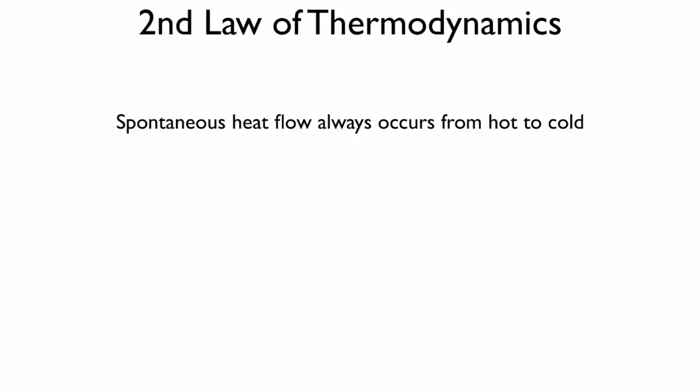Will the ice cube ever suck in more cold? If it just sits there, it can't suck in cold. It doesn't suck in cold. And that's kind of what the second law of thermodynamics is trying to say. Heat always flows from the hotter thing to a colder thing, not the other way around. The ice cube's not going to cool off the table directly. The table will become colder because thermal energy is coming from the table into the ice cube, and so on and so forth. So that's interesting, but for a physicist, what really matters is what can you do with that information.

In physics, we're all about what can we cause to happen based on our knowledge. And we've been doing it all semester long. We did it with kinematics, we did it with Newton's laws, momentum, energy. All of these toolboxes we gave you were all kind of designed with this idea of what kind of motion can we cause to have happen. What sort of power do we have in being able to predict what's going to happen? These are all things that physicists are wanting to do.

So we're going to talk today almost exclusively about heat engines and refrigerators. We're going to talk a little bit about the engineering, but these are ideas, these are schematics, these are broad concepts about how do we take advantage of the second law of thermodynamics, where heat naturally moves from hot things to cold things. So is there a way to capitalize on what that is? And the answer is yes. We can make a heat engine or a refrigerator.

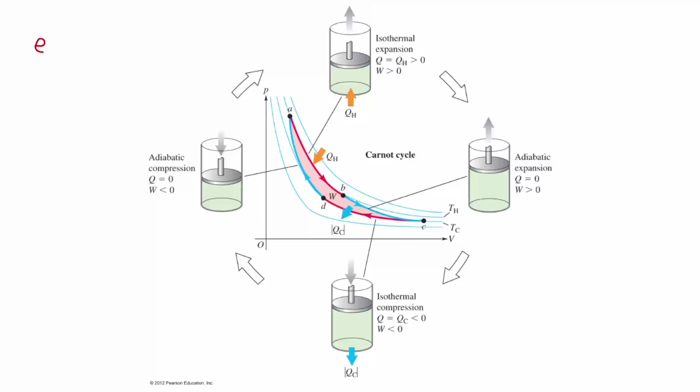calculated what the efficiency of this engine would be. So let's talk about efficiency real quick. We use lowercase e to indicate efficiency. Efficiency, by definition, is what you want divided by what you have to spend to get there. That's sort of like the overall definition of efficiency.

If we go back to our Carnot engine that we have right here, what are we spending? What's going into the engine? Think even just in terms of the symbols on the paper right here. QH is what's being spent, right? There's this hot reservoir, this hot side of the engine, and QH is being used to produce work. And so efficiency was calculated as work divided by QH.

I should use capital H - I usually use lowercase h, but that's how I was taught. But we'll use capital because that's what your book does. So again, this is a way to do it. But there's an alternative to this one that also works, which is 1 minus QC divided by QH.

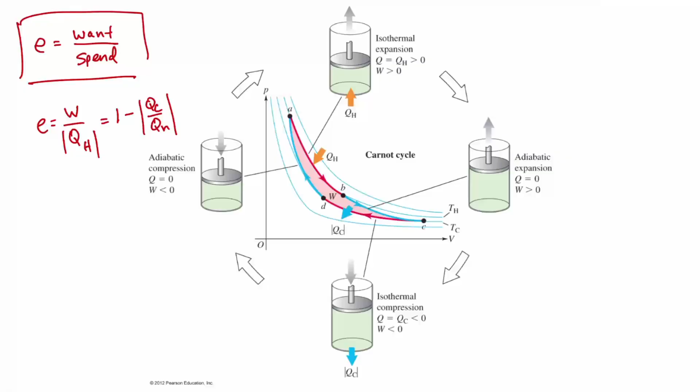Now, all of these definitions right here for the efficiency depend on you knowing the amount of energy. Remember, Q is an amount of energy measured in joules. So you have to be able to measure the energy content of your hot reservoir or your cold reservoir,

which is technically very difficult to do in a real world application. And so Carnot went a little bit further and defined the efficiency in terms of the temperature. See how in this engine we have hot reservoir and cold reservoir, but then we also have a hot side temperature and a low side temperature. So Carnot went and derived the maximum theoretical efficiency of the Carnot cycle, which again, the Carnot cycle is the

best cycle we have in nature: 1 minus the temperature of the cold divided by the temperature of the hot.

You need to realize that this efficiency is kind of like a ratio, so it's a unitless value. Because, for example, what you want divided by what you spend - what we want is work in joules, and what we spend is the hot side in joules. A joule divided by a joule is no units, right?

Efficiency is also a number that is between 0 and 1, with 1 being 100% efficient. Like, how do you get 1 out of W over QH? What has to be true? They have to be equal to each other, right? To get 1 out of this, work and QH have to be the same, right? So that's how you get 100%.

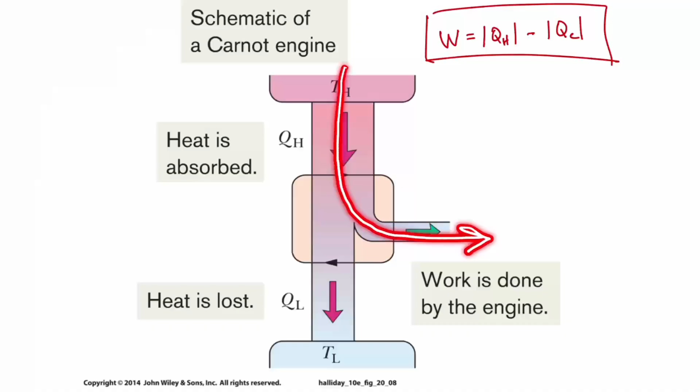In other words, all of the heat got turned into work, and there was no exhaust. That's 100% efficient, okay? Carnot showed us why 100% efficient engines are impossible. Brandon, do you think you can see why? Since you asked the question.

Well, it looks like one is like maximum efficiency. Yeah, the ratio of cold over the heat. The cold over the heat. Look at the temperature one. And maybe the clue is that these temperatures have to be in Kelvin.

What does the temperature of the exhaust have to be to get 100% efficiency? 0 Kelvin. So the only way to have a 100% efficient engine in nature is for the exhaust to have a temperature of 0 Kelvin, which is impossible.

So another way to state the second law of thermodynamics is that 100% efficient engines are impossible. You will always have some amount of exhaust energy, and that exhaust energy existing means that your engine was not 100% efficient. So it's impossible for us to use all of the hot side, because it would mean we'd have to have an exhaust that had no energy in it.

Why don't we make our engines cold then? Okay, yes, this is a good question. My car not want to start when it's cold. It would be more efficient when it's cold. Right? Okay, it's not that the engine itself is cold. It's that the exhaust has to be cold.

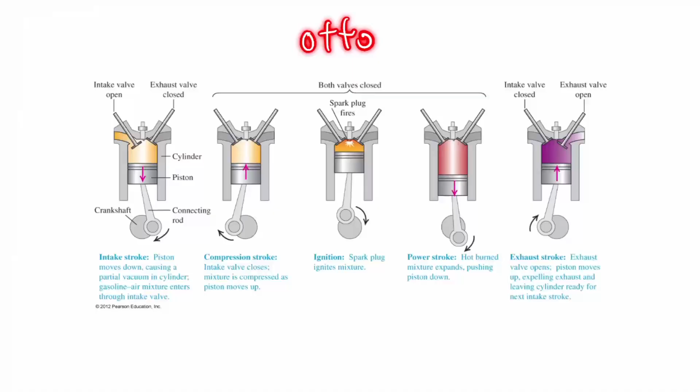And this is from an engineering point of view now, the actual practical way that it does it. First, fuel is introduced into the piston cylinder through a valve at the top, and the fuel is mixed with air. So it needs to be gasoline and oxygen in the air mixed in the correct ratios for it to be the most efficient.

Then your car's engine compresses that fuel-air mixture, okay? And in that compression, it pushes all of the gas and the air, everything, and squeezes it right down. When it's at the maximum amount of pressure, the spark plug goes off.

And that spark plug ignites that fuel-air mixture, and you get what's called the power stroke. The explosion of that fuel-air mixture pushes the piston down, and that's where you get all your work out.

But what's left over is a lot of hot gas, some unburnt gasoline, thermal energy that wasn't used in pushing the piston down. So on the next part of the stroke, another valve opens and pushes that exhaust out into the exhaust system that eventually goes down to your tailpipe and pushed out of the way.

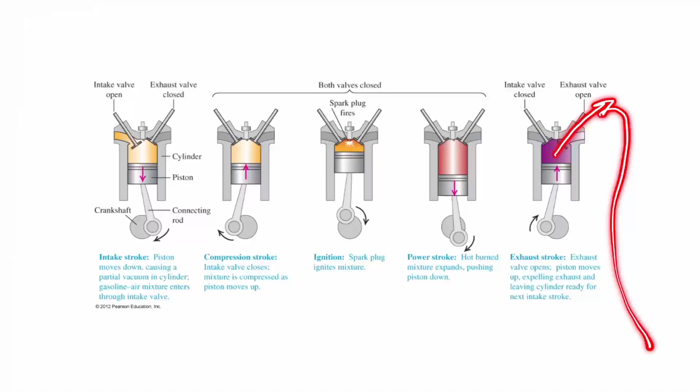So this cycle right here is not the Carnot cycle. The Carnot cycle is the best nature can do, period, but we can't pull off a Carnot cycle in an engine, practically, engineering-wise. What we can do, though, is the Otto cycle, the internal combustion engine cycle, right? And we get a certain amount of work out for the heat in and the exhaust that is put out.

So I wrote down on the other slide all of the different ways we have of calculating efficiency, right? But what the second law of thermodynamics tells us is you cannot have a 100% efficient engine. You can get kind of close.

But in terms of real world cycles that can be used over and over again, the internal combustion, the Otto cycle, at best is like 45% efficient. Your car's engine is probably more around 30% or lower. The amount of engineering required to get an internal combustion engine to be efficient is actually pretty high and very expensive, which is why it's never really done.

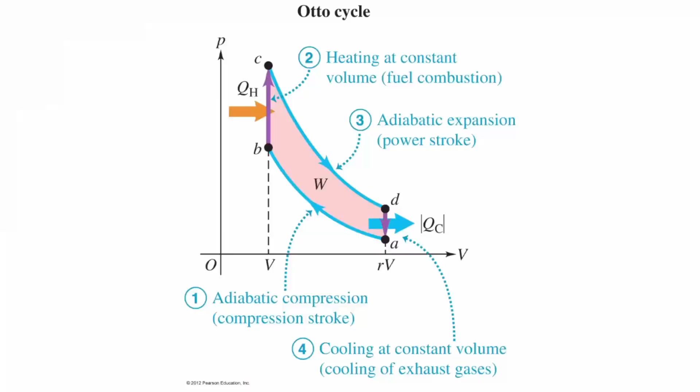So what I'm going to do, because I already have the work, is what I want divided by what I spent. What I want was the work, 2,600. What I spent was 9,000. I got 0.29, or 29% efficiency. It's not great for an aircraft engine, tell you the truth — aircraft engines are actually fairly efficient, like they'll push 70 to 80% efficiency. It's really good, they have to because they lose money if they don't.

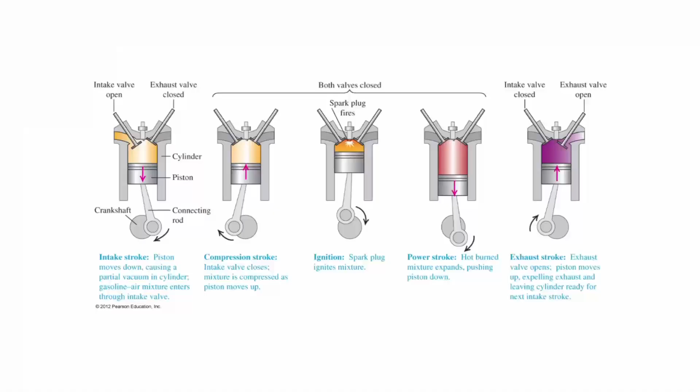1 minus — what's the cold temperature? 450. The hot? This gets an efficiency of 82%, so 0.82 or 82%. So the initial design here wasn't that great, they only got 30% efficiency, which is really sucky for an airplane engine. Assuming they can get those temperatures out of the engine, then they should be able to make it work, which is what they do.

Jet engines operate at temperatures that should melt the materials that the engine is made out of. One of my favorite YouTubers is Dr. Derek Muller of Veritasium fame. Just last week, he did a video on the materials that go into jet engines, and it's pretty exotic, some of the stuff they're doing to try and make materials that won't melt under the extreme conditions in a jet engine. You should go watch it, it's pretty fascinating stuff. But what they'll do is run their engines at close to the melting point temperatures of things like tungsten, so like 3,000 Kelvin inside the combustion chamber, and then try to reduce the temperature or capture the energy of the exhaust coming out.

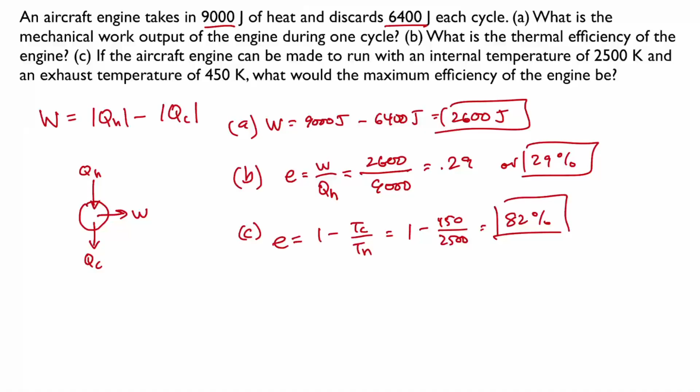Way better. Full disclosure, I drive an electric car, because I can't stand cars that have liquids in them anymore. I don't know, I've become elitist I guess. Like oil change - what's that? I don't understand what you're talking about. You don't have to do an oil change in an electric car. The only thing I haven't had to change yet... I have to put wiper fluid in my car. Yeah, that's it. Brake fluid - I don't have to put any brake fluid in. The brakes are used so little that I have to check my brake fluid every 6 months to make sure there isn't too much water in it. It stays in the car so long that it can actually soak up water because it's very hydrophilic. So I got a little brake fluid tester that I test with. But that's it. I haven't been to the gas station in years.

All right, this is the schematic diagram of... but what's the bad side to electric cars? Two very bad things. Okay, three very bad things. Not every electric car is made by Elon Musk.

The price of an electric car—they are expensive, okay? No, actually that's not a problem. That's a falsehood, get that out of your brain. Internal combustion cars cost more in terms of pollution to produce. I have the hard data to prove it. It's still pollution, yes, but it's apples to apples pollution, and the internal combustion car is worse in its production process. The falsehood that it takes more pollution to create batteries than internal combustion cars is totally false. There's way more plastic parts in an internal combustion car, way more. Anyway, it's cost, initial cost of the vehicle, okay?

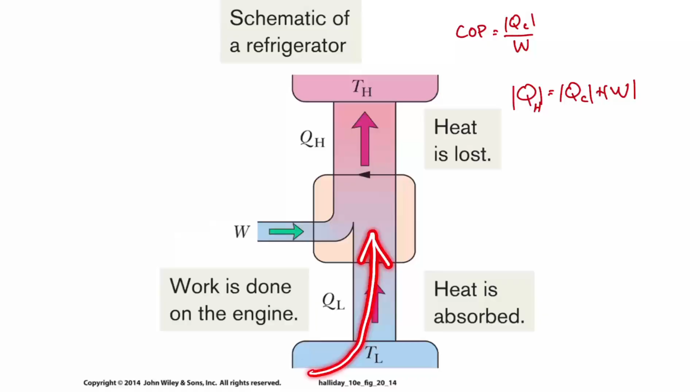So if we do 50 joules coming out of the cold side and we put 70 joules of work in, how much exhaust do we have? 120, right? It's again a conservation of energy statement. So we have our coefficient of performance, and then our conservation of energy statement. We should be able to make our way through.

There's a Carnot refrigerator. Don't worry about it, we don't talk about it. Okay, instead you might... yeah go ahead.

I forgot it, can you go back to the other slide? You made me forget by changing slides. Yeah, that's right. You want me to go back? Yeah, actually that's fine, is it too late? You don't remember? No, okay, it's gone.

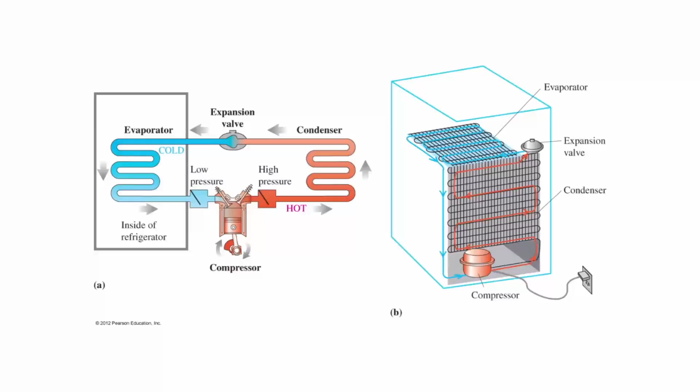You've probably heard your refrigerator kind of kick on and kick off. You're hearing the compressor, a little buzzy noise as it runs, compressing the gas.

What's this? It's an air conditioner. In other words, it's a whole home refrigerator.

Because an air conditioner has a hot side and a cold side. An air conditioner, what side do you want the cold side on, the inside or the outside? You want the cold side on the inside. But in order to get that cold to be cold, you need to get the heat out of it. And so where are you going to push the heat? To the outside. Refrigerators, whether they're air conditioners or actual refrigerators, are called heat pumps. What does a heat pump do?

It pumps heat around, okay? My home has a heat pump. Our furnace that was...

We replaced it with a heat pump. At the time, it's still illegal to install new gas burning furnaces in homes. You have to install electric heat pumps because gas burning furnaces are dumb and inefficient.

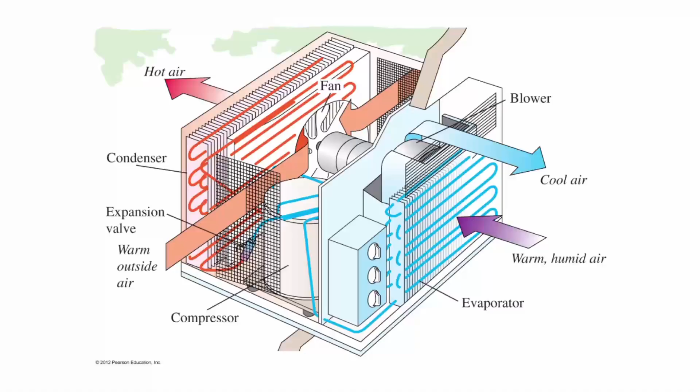You'll get there, I promise you'll get there. You're in the right place at the right time, doing the right thing. You'll eventually get to the point where you'll be able to afford these things. Don't let anybody tell you that your future is doomed. Okay? My generation's screwing it up for you, but there's some of us that are fighting for you.

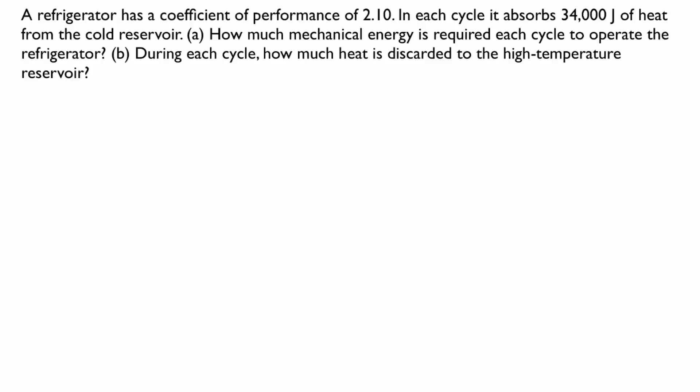Efficiency. All right, let's do some calculations with the coefficient of performance. What are we told? We're told that the coefficient of performance is 2.10. Again, no units on that, it's an efficiency number. Coefficient of performance, by the way, can go above 1.

Don't think about it, just accept it and move on with your life. Efficiencies in engines can never be over 1, they're always less than 1. Coefficient of performance, I think the worst coefficient of performance is 1, and then things get better as you go up.

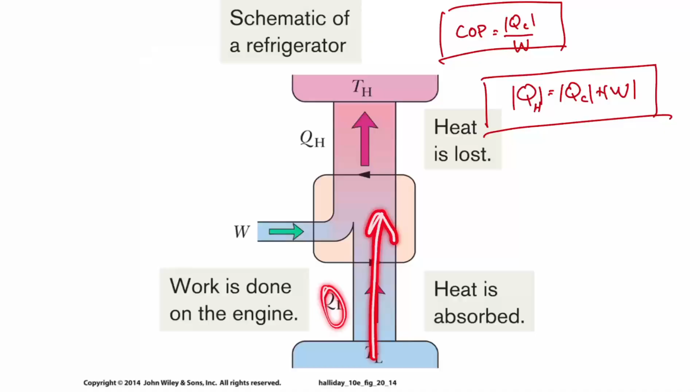All right, so what do we got? There's an absorption of heat from the cold reservoir. So of all the things we could be writing down, where were they? Right here. We have our coefficient of performance, which is QC over work, but then there's these three things: we've got QC, which is QL on this diagram, QC coming up, work going in, and QH coming out of our refrigerator. What I like to do sometimes is draw my engine: QC in, work in, QH out. This is my little schematic to keep me oriented between an engine and a refrigerator.

This 34,000 joules of heat has to be one of these three things. You can guess and have a 1 in 3 chance of getting it right, or you can be smart. Where is the 34,000 joules supposed to be? Is it work, the amount we're putting into the engine? No. Is it exhaust, what's coming out of the refrigerator? No. What does it say? It absorbs 34,000 joules of heat from the cold reservoir. So the 34,000 must be this leg right here. If it was the exhaust, it would say it expels or extracts energy into the surroundings, that's what the language would be for that. So I'm going to assume that my QC is 34,000.

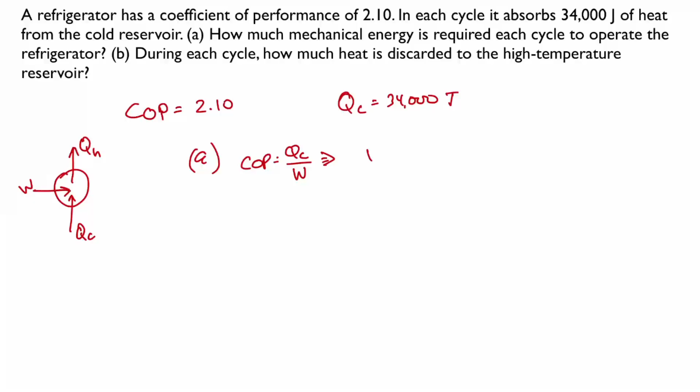And if I know my coefficient of performance, can I figure out what my work is? Yeah, the mechanical energy required. So the coefficient of performance equals what we want, QC, over what we spend, which is the work. So that means I can solve this for the work: the work is QC divided by the coefficient of performance, which is 34,000 divided by 2.1, which is 16,200. There's the amount of work that went in, the mechanical energy required each cycle.

And then how are we going to find out how much heat is discarded? QH is equal to QC plus W. By the conservation of energy, the amount of heat coming out has to be the sum of the two things that went in. So that's going to be 34,000 plus 16,200. 52,000? Wait, no, it's 50,200. I missed a zero in my calculation in my head. This is why you should never do calculations in your head.

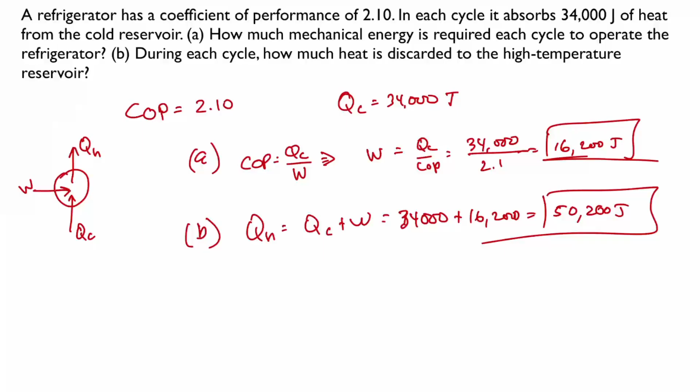Are the calculations here hard? No, it's the keeping track, right? It's making sure you know which one's QC, QH, all that kind of stuff. Follow the concepts behind it, and you'll be okay.

So heat flows from hot to cold, or at least spontaneously flows from hot to cold. Another way to say it is there's no such thing as a perfectly efficient engine or refrigerator. I remember my question from earlier: I keep saying heat is absorbed or anything, but I thought heat was a transfer. It is, and that's where we go wrong. So what we're saying is technically wrong, we're saying a heat transfer or an absorption transfer. It's weird, but it is the way it is.

Humans are dumb. But there's another way to talk about the second law of thermodynamics, and that's entropy. Now don't panic, if you've been in chemistry, we're not going there. We're going to take this from a different point of view, because entropy is often talked about as the disorganization in a system, but that doesn't mean anything to me.

I tried to argue about entropy to my mom about cleaning my room. I was like, Mom, the universe is just going to always increase its entropy, so I'm just helping it. She was a biologist, she didn't buy it. I had to clean my room.

This whole organized, disorganized thing can be useful, but it doesn't really get to the whole essence of what's going on with entropy. When I was growing up in Santa Cruz, where we're all hippies and tree huggers and all that kind of stuff...

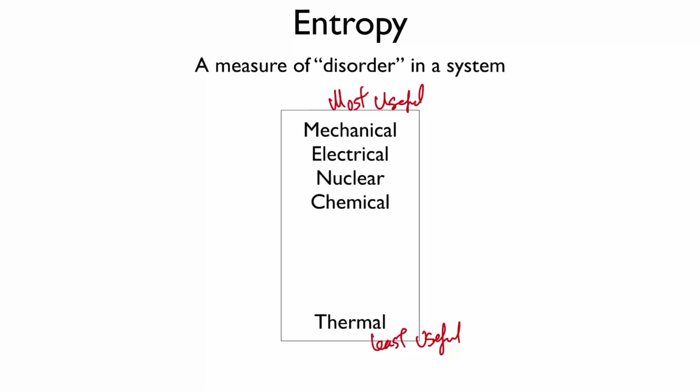And that's a great thing for government to be involved in, because corporations won't spend money on something if they don't have to, but governments can. So you incentivize, you get the problem, you get the ball rolling, and things will happen. And it is happening, it's happening right before our eyes. I just wish it would happen a little bit faster so that human suffering could be a little bit less in the transitions that we have coming up.

Comic strips, kind of an old-fashioned idea. I don't know, do people read comic strips anymore nowadays? Not really, mostly it's TikToks and memes and that kind of stuff. But it is kind of nice to know you're on the winning side.

Human beings are basically organizational creatures. We're constantly organizing things, and I'm not just talking about your obsessive compulsion to clean things up. I'm talking about we take food in and we build up structures in our bodies, and then we put the waste out, the stuff that we can't use. We organize by building buildings and all that kind of stuff.

Entropy in the universe wants to decay all of that down. One of the ways of talking about the second law of thermodynamics is that you must pay a price for all natural processes—even forced processes—the amount of entropy will always increase.

Ultimately, where do we as a species and a planet get our energy? The sun is the answer. All of our energy comes from the sun. Nuclear could be argued to be independent of the sun, but basically the elements are there from when the sun was created, so we got it from the sun. In the protoplanetary disk that formed, it was stellar material. So we get it from the sun.